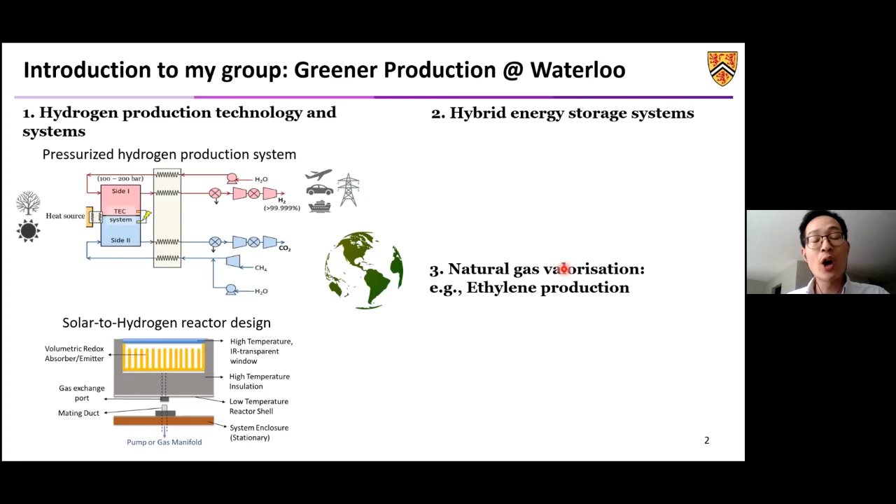In the lab, we deal with different production solutions for chemicals and energy. Currently we are working on three different topics. The first is hydrogen production technology and systems. We are developing a pressurized hydrogen production system that will decrease the energy consumption for the downstream compressor for the hydrogen gas. We are also looking at solar to hydrogen reactor design, where we want to understand the kinetics as well as the flow dynamics inside the reactor so we can design a better and more efficient solar to hydrogen reactor converting solar energy to hydrogen.

Another topic we are working on is hydrogen and hybrid energy storage systems. In this project, we are looking at using a hybrid storage solution combining battery and hydrogen to store variable renewables, for example solar and wind, so we can stabilize the grid as well as provide greener solutions for consumers. The third topic we are working on is natural gas valorization. Here, for example, we are converting natural gas into ethylene so we can decrease energy consumption as well as increase the selectivity for ethylene production using methane oxidative coupling in a membrane reactor.

In today's talk, we're focusing on the first topic, hydrogen production technology and systems, and will tell you more about how we use an oxygen permeable membrane to enhance hydrogen production from water.

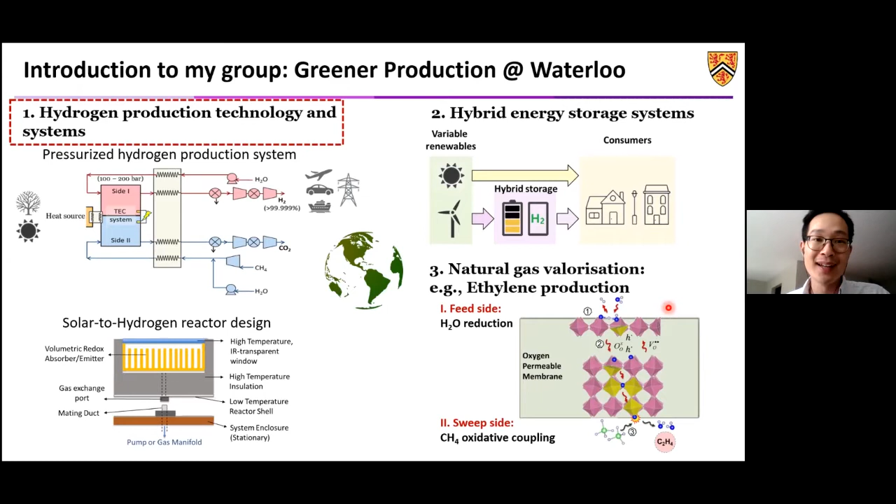Why are we talking about hydrogen these days? Because there is more and more attention now on hydrogen. Recently, if you're following the energy news, you know Germany will release a 9 billion euro plan to use hydrogen to recover their economy. Also in the US and Europe, they are developing hydrogen strategies or hydrogen roadmaps for economic development. In Canada, we are also developing a national hydrogen strategy, which could be different from the US because the US is looking at hydrogen from coal. But here in Canada, we have a lot of renewable electricity, and we also have a lot of fossil energy, so this is a great chance for us to use these energy resources to produce hydrogen for the economy.

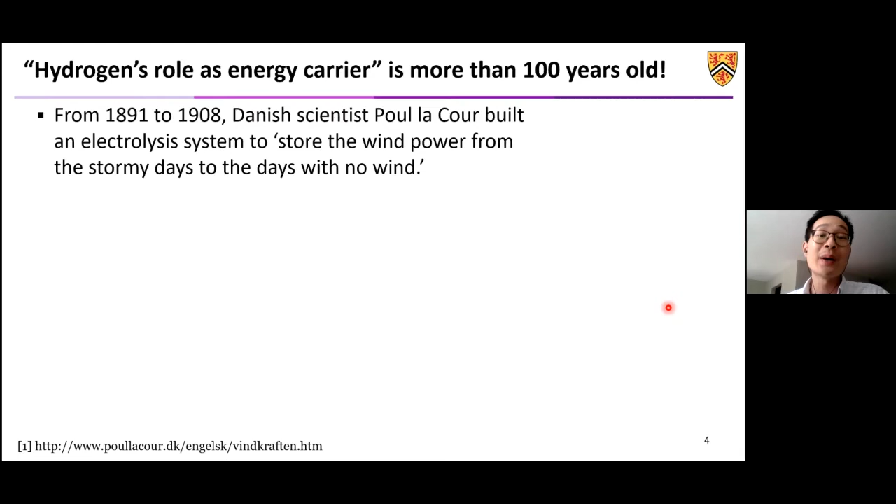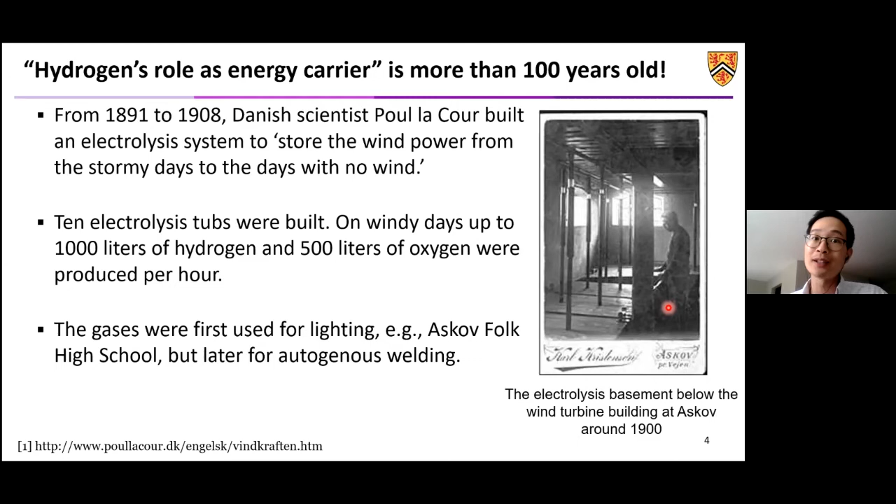This inspired a British scientist called Haldane, who hypothesized a new type of system where different power stations located at suitable distances could convert excess wind energy to hydrogen, store the hydrogen at these power stations, and then convert it back into electricity when there's no wind. This further inspired a professor in the US who was the first to use the term hydrogen economy, in the 1970s—Professor Bockris at Texas A&M University, who envisioned that the US could be supplied solely by solar energy with hydrogen storage.

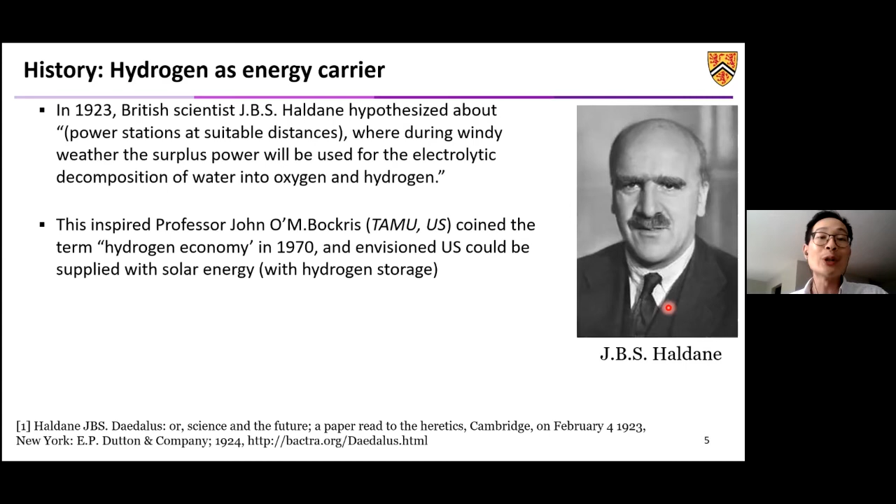From that time on, we know more about hydrogen in the energy carrying industry as well as different renewable energies industry. That's why there are more and more hydrogen products coming to the market. For example, Germany in the 1990s actually had the first solar power hydrogen production plants. Later we see hydrogen fuel cell cars as well as hydrogen fuel cell buses running around the globe. Also in 1999, Europe has the first hydrogen fueling station in Germany. So this will make you think that hydrogen is actually a very important energy carrier.

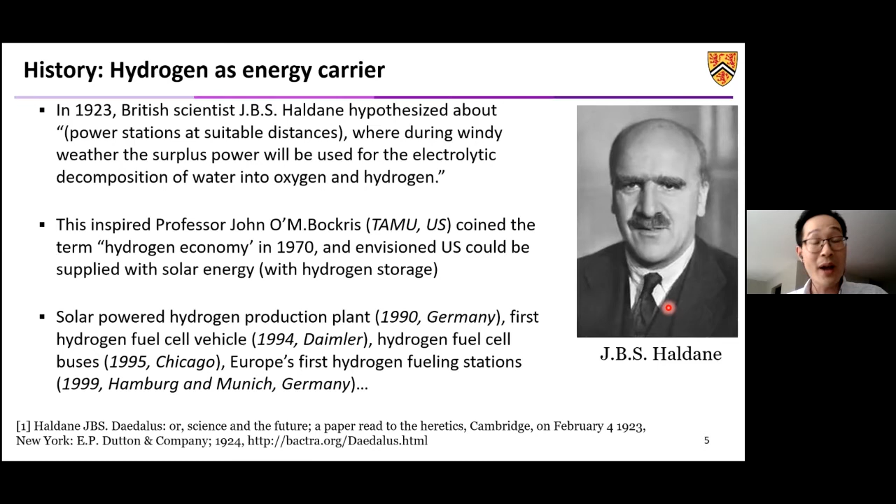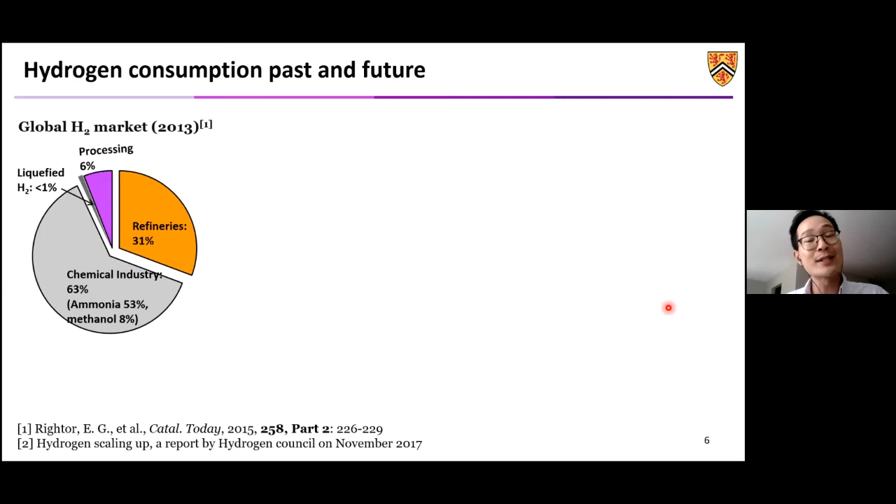However, since we're talking a lot more about hydrogen, about renewable hydrogen these days, people envision that in the near future, from now, 30 years from now, the hydrogen market can increase around 8 times, from 10 exajoules to around 80 exajoules. So the hydrogen can be used, for example, for power generation, energy storage, in transportation for fuel cell cars, trucks, trains, etc., and also to provide energy for industry, for buildings, as well as new feedstocks for advanced chemical industry technologies. So there is great potential for hydrogen in this market in the near future.

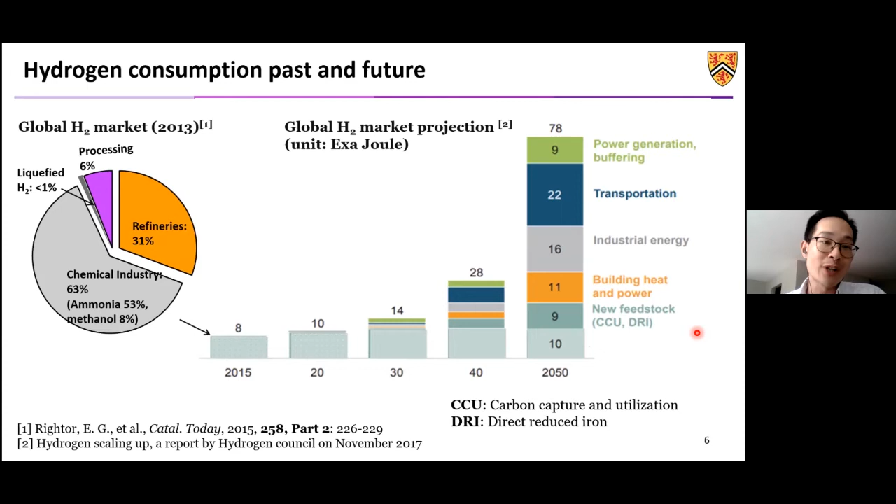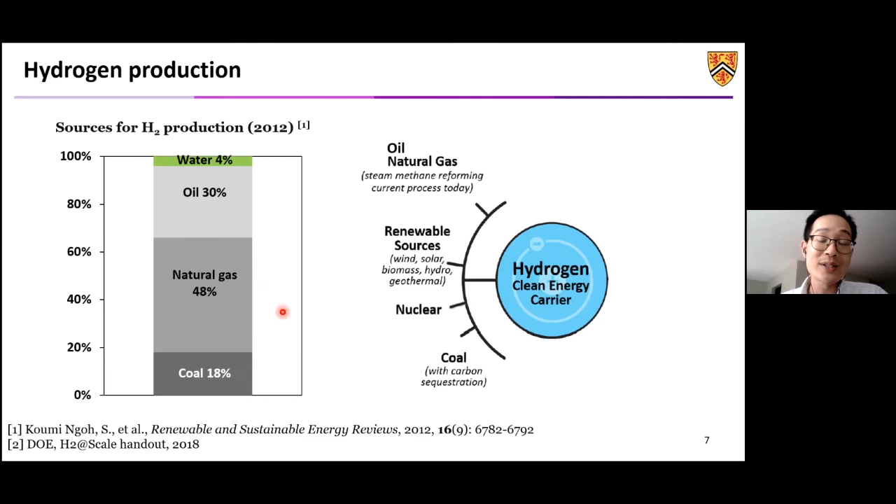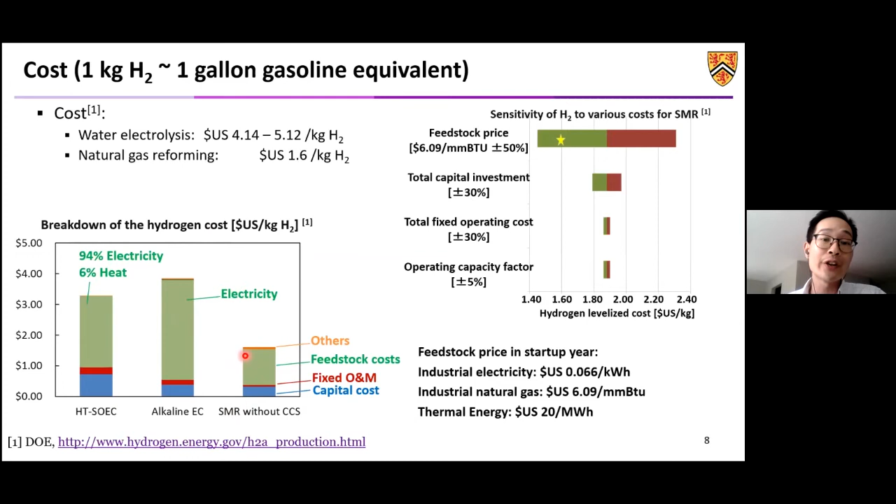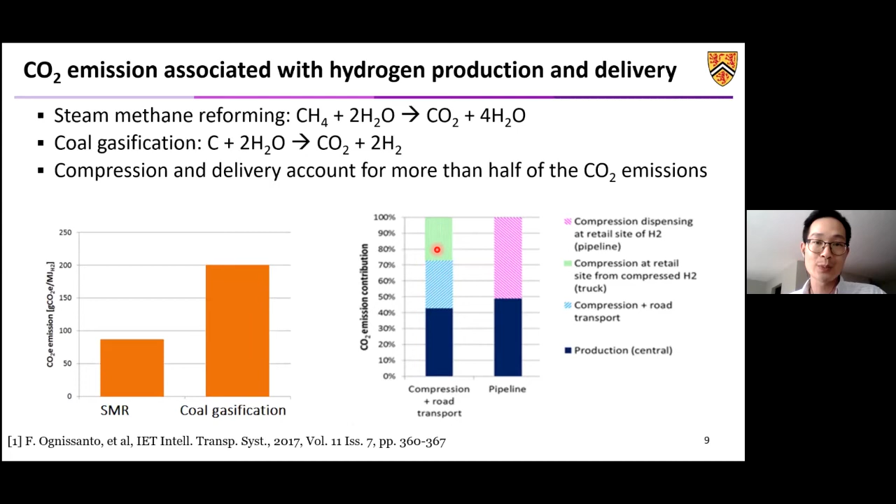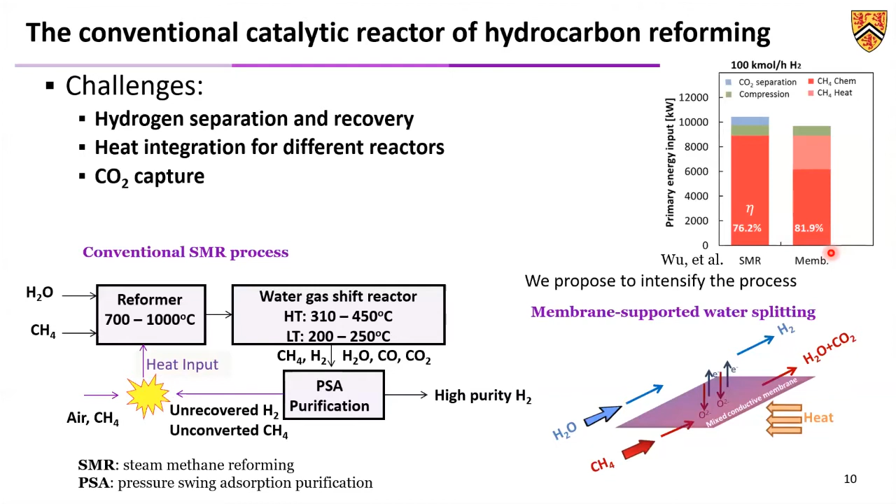We did some analysis to compare these two processes for hydrogen production, shown in this graph. Here you can see that by process intensification with this membrane, we can actually increase the efficiency from 76% to 82%, which is a 6 percentage point increase. So you might be wondering, what is this magical membrane?

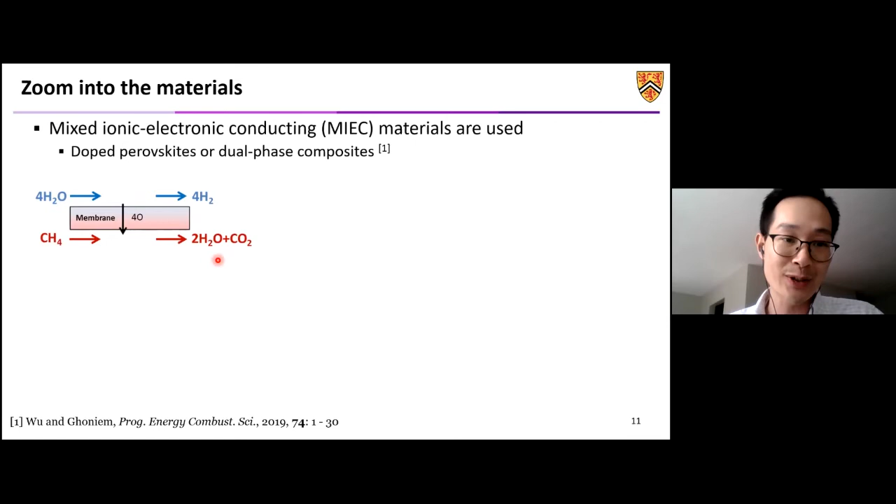So now let's zoom in to look at this membrane. This membrane that we are using is a mixed ionic electronic conducting material, usually a doped perovskite or dual phase composite. So here's the process again: we have water producing hydrogen and oxygen. Oxygen diffuses through this membrane and then reacts with the methane to produce water and CO2. If you look at this membrane, it's actually a dense membrane, so there are no pores—that's why we can achieve very high selectivity of oxygen permeation. Only oxygen can permeate through this dense membrane, in the form of oxygen ions.

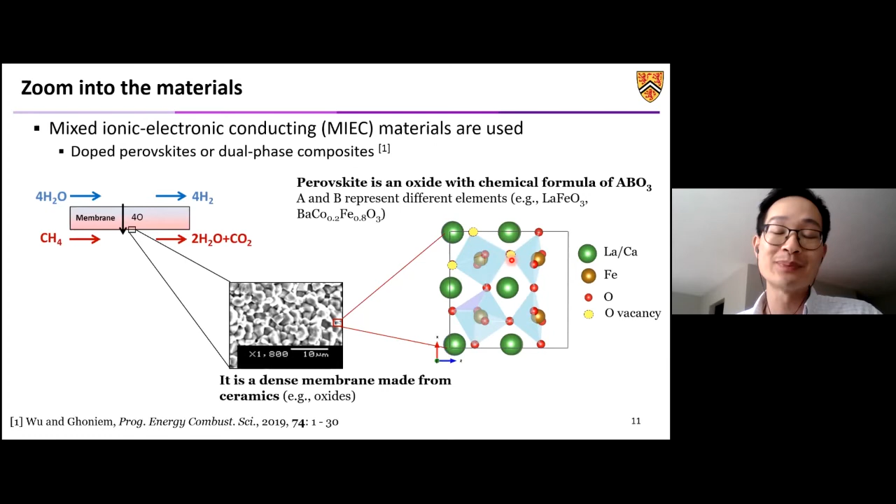If you look at the entire process, we can separate it into 5 different steps. The first step is that water vapor diffuses to the surface of the membrane. After that, the oxygen from the water reacts with the oxygen vacancies to form lattice oxygen, while the hydrogen is produced and diffuses away from the surface. Once the lattice oxygen is formed, it diffuses through this membrane to the other side, driven by the chemical potential gradient, hopping from one vacancy site to the other, to the other side of this membrane.

After that, this oxygen reacts with the methane to form CO2 and water, and that's when we can capture the CO2 very easily from the methane side. As I mentioned, this process is driven by the chemical potential gradient. On the water side, we have a very high chemical potential gradient, with high partial pressure of oxygen. On the methane side, we have very low chemical potential and very low partial pressure of oxygen. Because of this, the oxygen vacancies diffuse through this membrane from the sweep side to the feed side, while the lattice oxygen diffuses from the feed side to the sweep side.

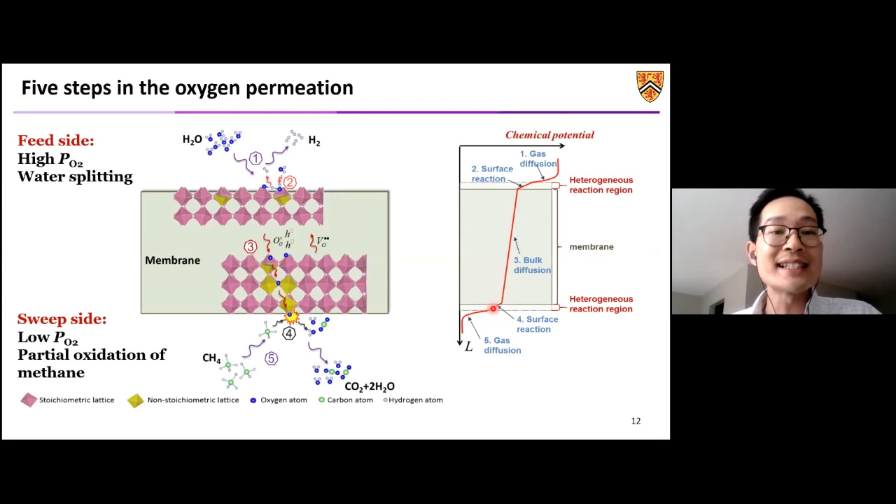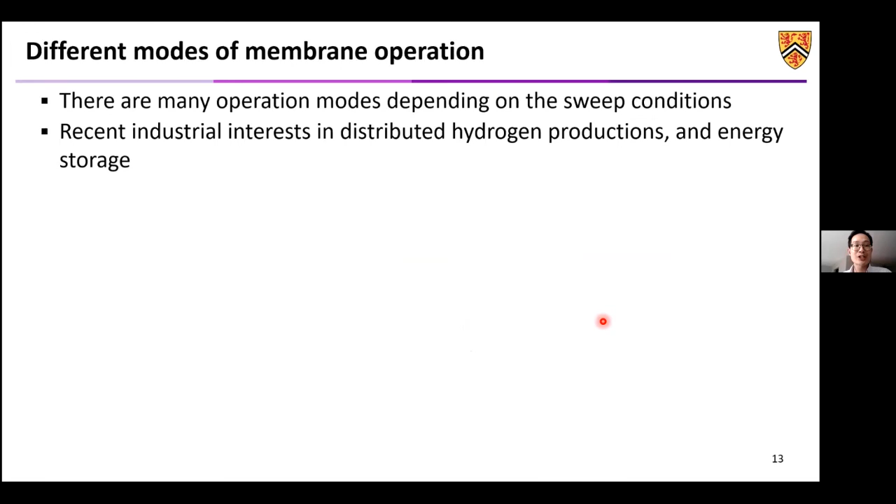So this is how it works in this membrane reactor. And since this is an oxygen permeable membrane, there are different types of operation modes depending on the sweep side. It can be applied, for example, into distributed hydrogen production or as an energy storage technology.

So the first of these modes we'll call the hydrogen-oxygen production mode. In this case, hydrogen is produced from water splitting, and oxygen diffuses through this membrane, driven by a vacuum. We lower the partial pressure on the sweep side by using a vacuum, so the oxygen diffuses from the water side to the oxygen side. In this case, we can produce hydrogen and oxygen.

And if you don't want to use vacuum because sometimes it's too energy intensive, you can also use an inert gas, for example CO2 or another type of inert gas, as a sweep gas to sweep away the oxygen from the membrane surface and create a low partial pressure on that side for diffusion. Again, this is also a hydrogen and oxygen production mode.

Since we have an oxygen source, we can control the oxygen partial pressure and the oxygen flux to react with methane, partially oxidizing it into hydrogen and CO, which is syngas, to further produce methanol, for example. In this case, we can co-produce hydrogen and syngas in this membrane.

And if you just want hydrogen, you can fully oxidize the methane by continuing to flow methane and utilizing the oxygen. In this case, for 1 mole of methane we can produce 4 moles of hydrogen, pure hydrogen from the water side. The methane is fully oxidized, and we can capture the CO2 from the methane in this case.

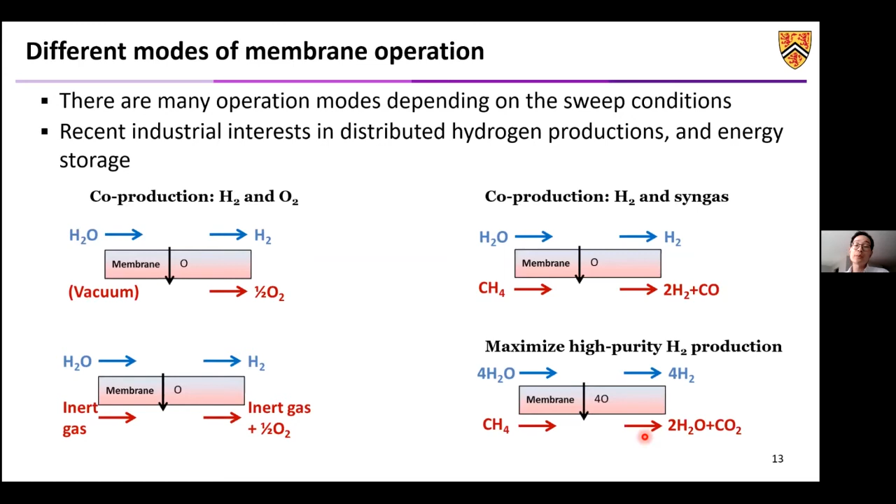And since we are utilizing this as a fuel or as a reactant that reacts with the oxygen, we can use different types of fuels. In this talk, I'm going to talk more about how we integrate this with coal gasification plants, to utilize the gasification product, which is syngas, and produce high purity hydrogen in this mode.

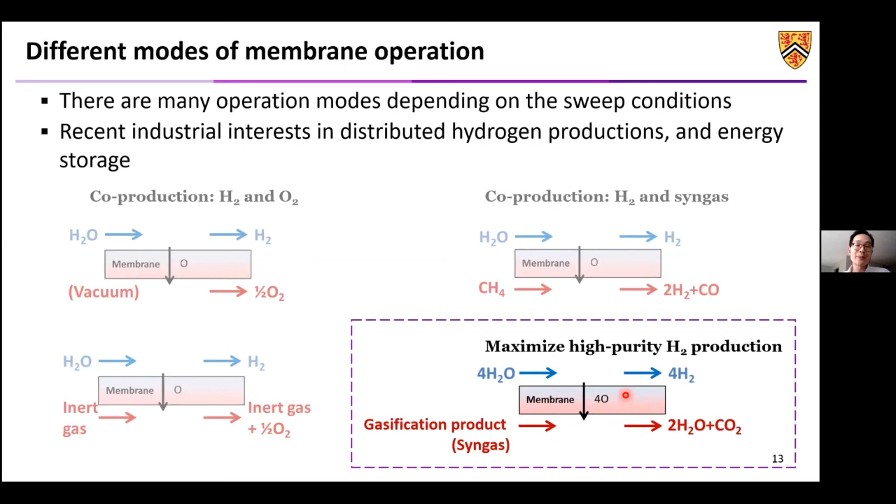So before we move on, I'll first introduce the gasification plant and what it is. Here shows a schematic of the integrated gasification combined cycle, IGCC plant, with carbon capture. This is a clean technology to utilize coal, but we can capture the CO2 in a more efficient manner.

Here shows the schematic: we have coal slurry fed into the gasifier to produce raw gas at high temperature and high pressure. The raw gas is a mixture of different gases, but it's very reducing - 35% of this is CO and 34% is hydrogen, plus some impurities from the coal. After that, this raw gas is cooled down, the dust is separated, and it's fed into a water gas shift reactor to increase hydrogen production.

After that, the CO2 is separated using a two-stage Selexol process for the CO2 compressor. Also, the hydrogen sulfide from the process is separated to produce sulfur in the Claus plant. After this Selexol process, we have a clean stream of hydrogen, which is fed into the combined cycle - a gas turbine running at high temperature, and then a heat exchanger runs the bottoming Rankine cycle, increasing the efficiency of the entire coal power plant.

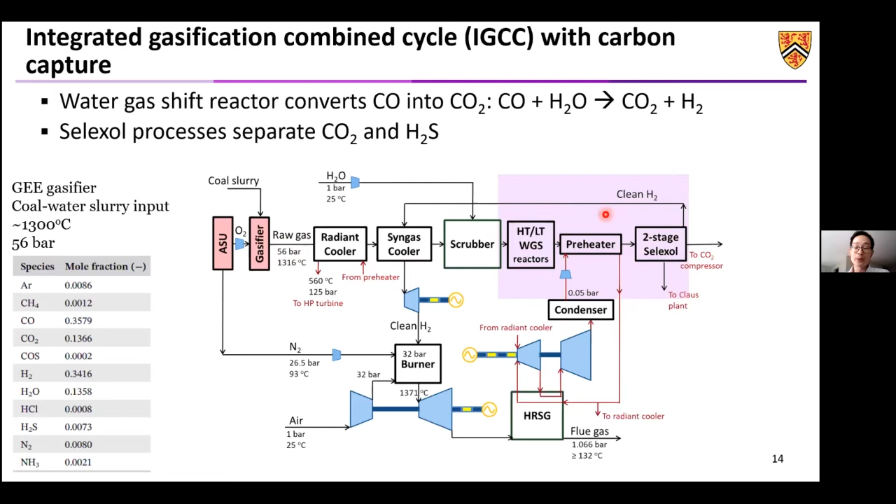So in order to improve efficiency, especially for hydrogen separation from CO2, we propose to use this membrane - this oxygen membrane reactor. On one side, we have water splitting to produce hydrogen. On the other side, we use the gasification product, syngas, as a fuel so that we can consume the oxygen and drive more hydrogen production.

And because we know that coal gasification has a lot of impurities, such as H2S, the membrane has to resist this type of poisonous impurity from the gasification products.

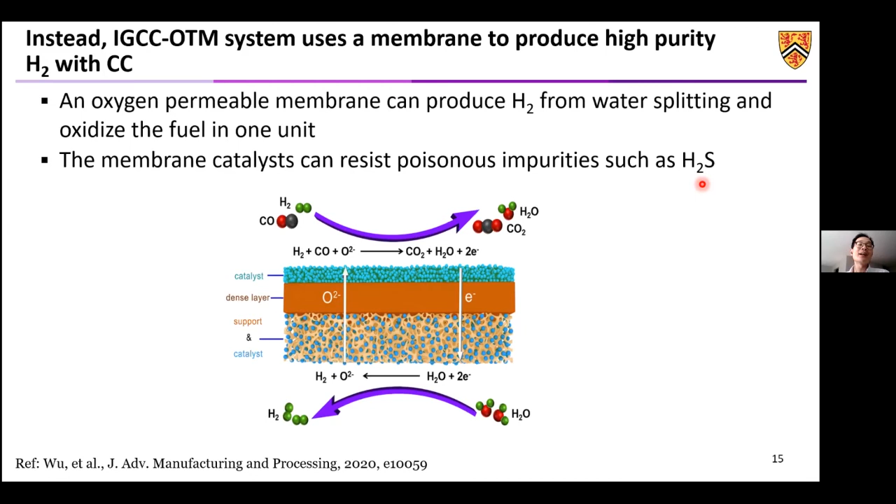So what it looks like in a system, it looks like this. In this case, we have this high temperature raw gas from the gasifier. It will go to this high temperature membrane reactor so that we can utilize the heat integration from the high temperature gasifier to the high temperature membrane. After that, using this membrane, we can use the syngas from the gasification to produce water, or produce hydrogen from water splitting.

On side 2, which is the water splitting side, we produce pure hydrogen with water as a mixture. And then on side 1, we have the syngas reaction. In this case, the only addition to the plant is this isothermal high temperature membrane reactor, and also some post-processing units to increase the efficiency of the plant.

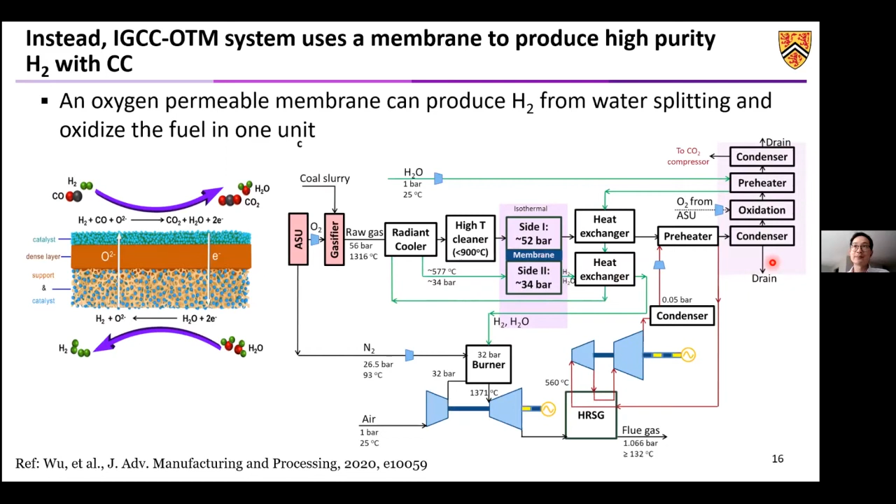So we use the counterflow configuration to maximize the conversion of this hydrogen. This is what we mean by counterflow: the syngas flows from the left to the right, but the water flows from the right to the left.

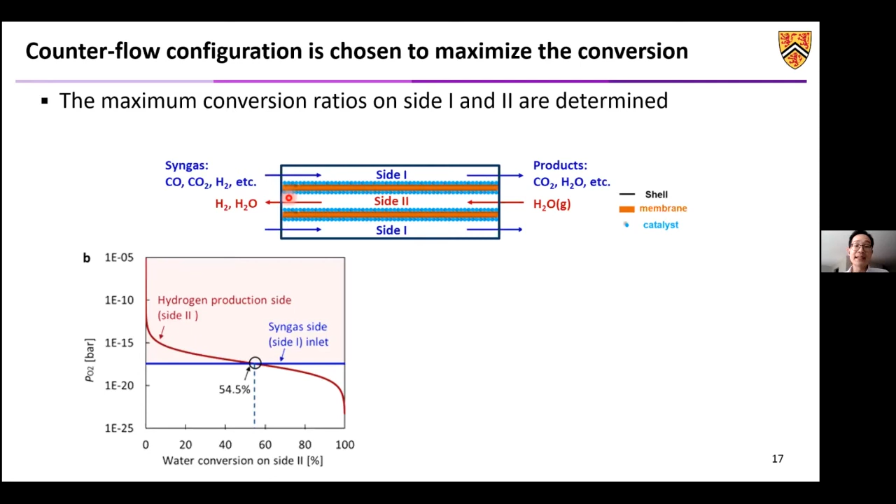We also know that when water is splitting, we are producing hydrogen, so the partial pressure of oxygen actually drops as the water is split. That's why we can decide what is the maximum water splitting ratio in our membrane reactor, which is around 55%.

On the other side, it's very similar. The maximum partial pressure is at the inlet on the water side, and the lowest partial pressure is from the syngas side. But when the syngas is oxidized, the partial pressure of oxygen increases, as shown here.

However, we can see that even though we have almost full conversion of the syngas into CO2 and water, we still have a potential gradient. That's why the syngas conversion ratio can be very high, as high as 99%.

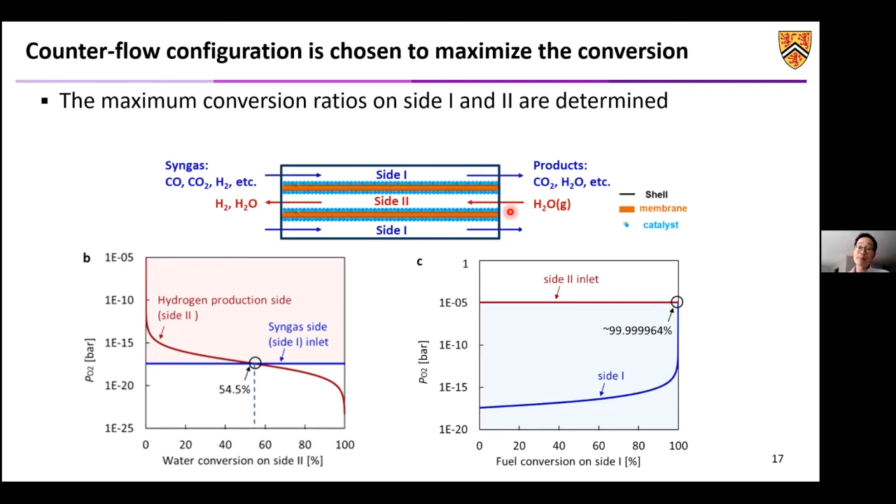So after we know the maximum conversion in our reactor, we can build a model for this system. We used Aspen to build this model to evaluate the performance of this new cycle. We defined the first law efficiency of this plant as the net work output of the plant, the electric output of the plant, over the heating value of the coal.

The net work output is defined as all the work produced by the turbo machinery minus all the auxiliary consumption, such as pump work, CO2 compression, oxygen separation, the Selexol separation process, etc.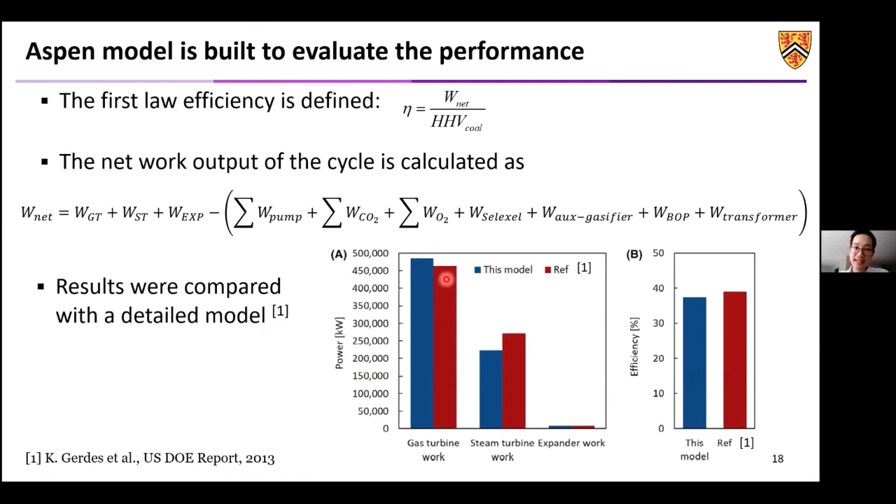The reference plant is the IGCC plant without CO2 capture. The IGCC WGS is the conventional IGCC plant with CO2 capture using a water gas shift reactor as well as the Selexol process. You can see that our newly designed IGCC OTM process, using an oxygen transport membrane, can decrease the auxiliary loads by a lot.

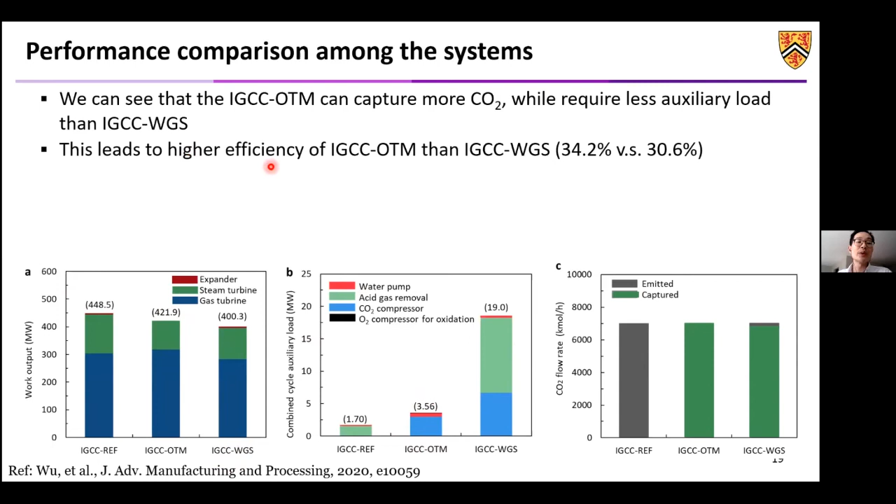That's why we can improve the efficiency of our plant. Because we decreased our auxiliary load, our net work output, compared with the conventional IGCC with CO2 capture, increased. That's why we can raise our efficiency from 30.6% to 34.2%.

We also calculate the energy consumption for CO2 avoided in our plant, and we can see that our newly designed IGCC OTM has an energy consumption almost 60% lower than the conventional IGCC with water gas shift reactor for CO2 capture.

These results again convince us that this new design is actually working. We can utilize this IGCC OTM process to increase our electricity output, even when we are capturing the CO2.

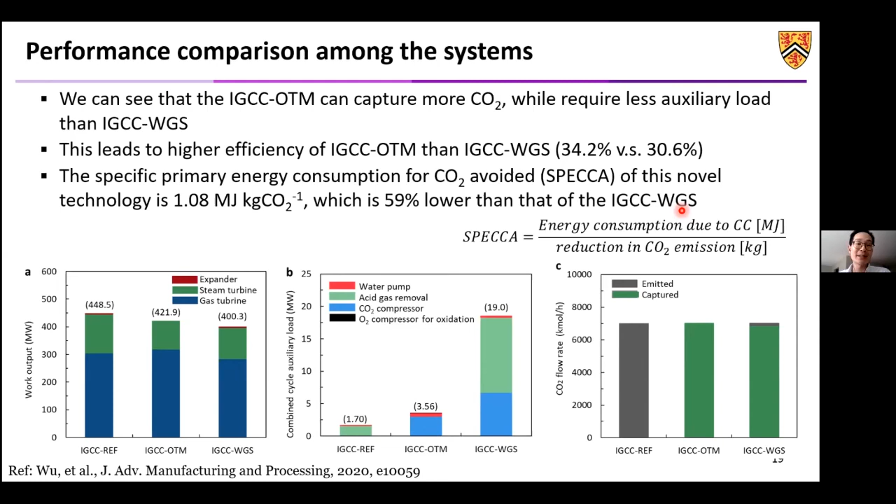Then you might be wondering whether this membrane actually works in reality. So that's why in the lab we designed this type of membrane and tested it in a very similar environment, fabricating a very stable membrane for this application so that it remains stable even though the environment is very reducing as well as corrosive.

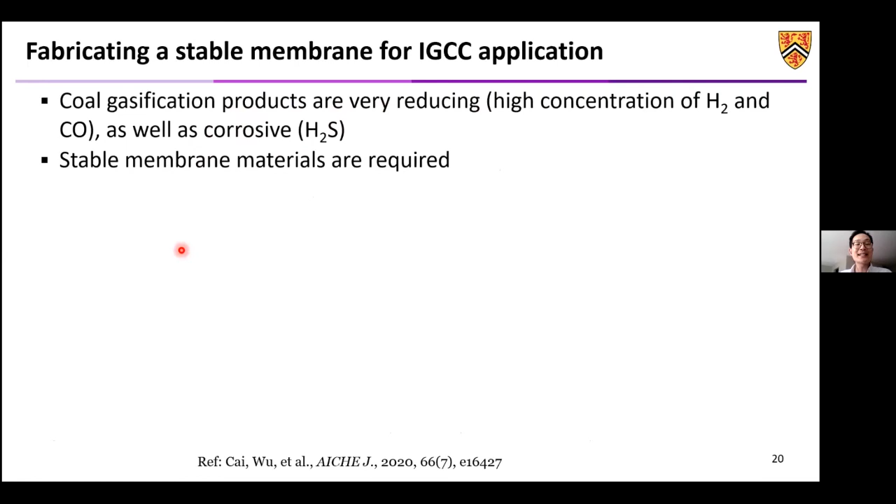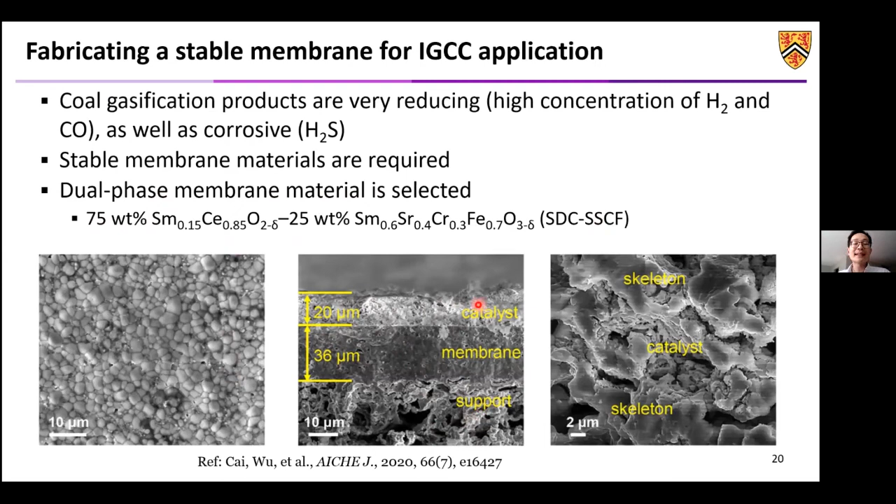We designed the membrane material as a dual phase material, and the chemical formula is shown here. If you look at a microscopic image, you can see the membrane is very thin, 36 micrometers. We have a catalyst on top of this membrane to enhance the reaction rates, and also a support, because the membrane is so thin we need mechanical support to increase its mechanical strength. The catalyst is shown in the next slide.

The reason we want to use a catalyst is because the surface reaction is actually the rate limiting step based on our model. We assign different resistances for different steps, since there are 5 steps in our membrane process, so we can compare which resistance is largest and therefore the rate limiting step. From the modeling, we see that the resistance on the sweep side, the surface reaction, is the rate limiting step, so we apply a catalyst on the surface to enhance the surface reaction and achieve higher hydrogen production rate.

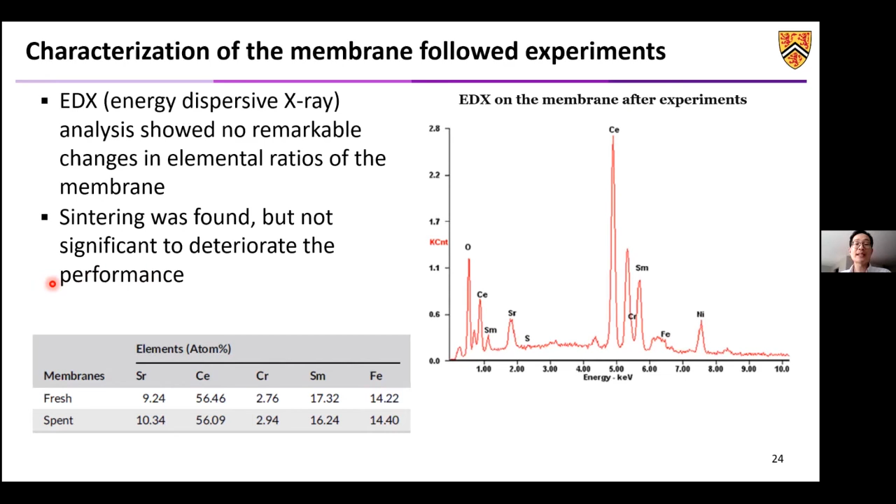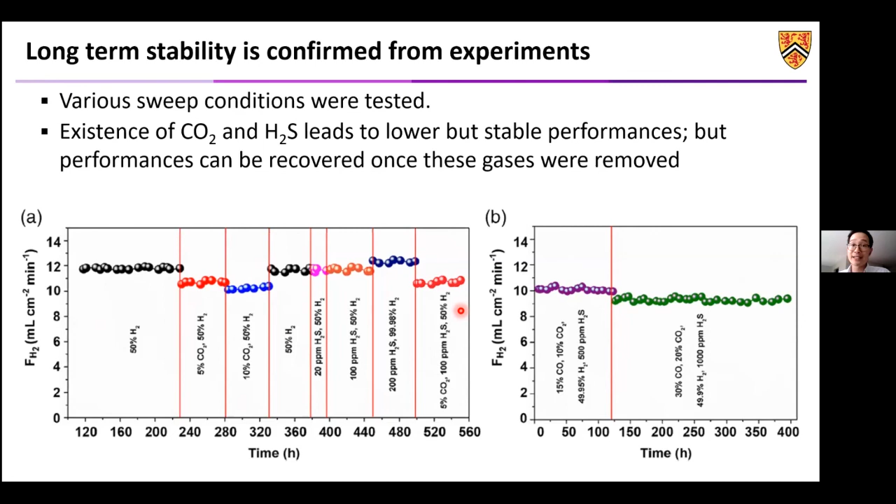So to summarize, I introduced you to this type of oxygen transport membrane to produce hydrogen, and we used this IGCC application as an example to show how we can use this OTM process to increase the efficiency and decrease the energy penalty for CO2 capture.

I also showed you that we experimentally fabricated this dual-phase membrane in the lab using non-precious metal catalysts, so that we can make sure the cost of the membrane is low, and also this type of membrane can perform very stably under very harsh environments in the gasifier.

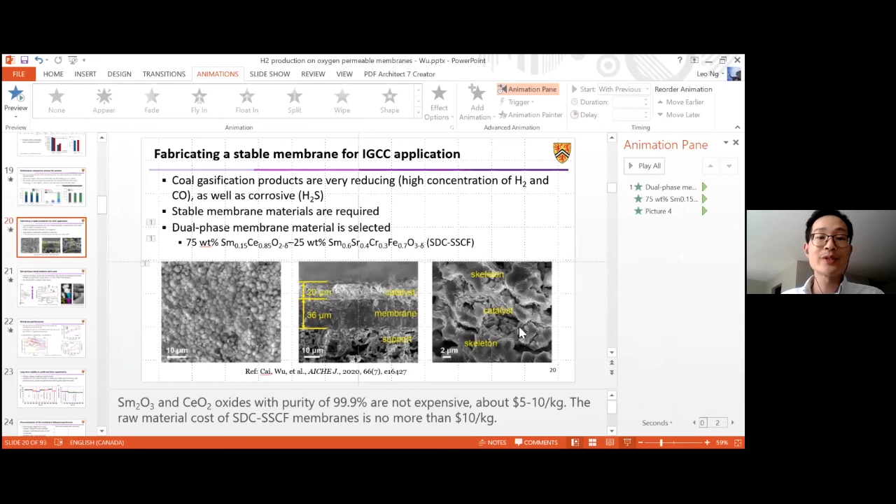Our collaborator in Dalian is scaling up this type of membrane production process. As I mentioned, the membrane we're using is this type of dual-phase membrane. We are not using a very expensive metal, so the source of these metals is very cheap, but the manufacturing process is more expensive at this moment because it's not scaled up. So we are working with Dalian to scale up this process so we can decrease the production cost of this membrane and move toward commercializing it.

So Dalian has a partnership with the University of Waterloo to explore this production of the membrane? We are exploring that, yeah. So they have the equipment on site to produce these membranes at medium scale. I would love to talk further, maybe off this webinar, and see if there are opportunities for us to collaborate with your work for some applications in Ontario. Yeah, sounds good, I would love to do that. Thank you very much.

Any more questions we have? I guess I have a quick question, if that's okay. Please go ahead. Thank you, Professor, that was such a good talk.

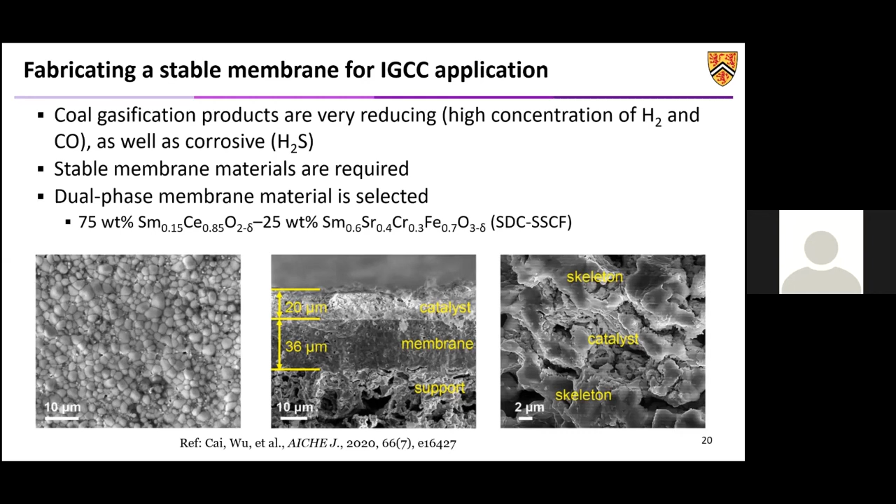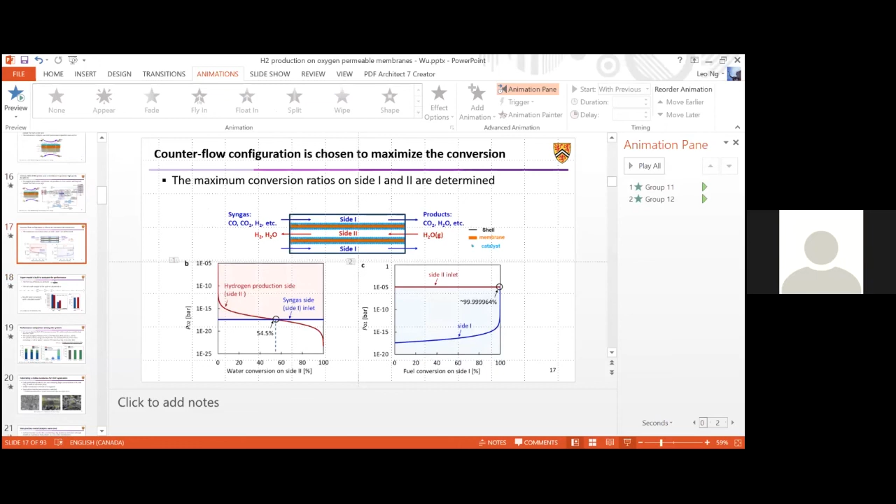I just have a quick question about the counterflow configuration that you talked about. I wonder if that counterflow configuration can be used for other applications, like the production of ethylene, as well as hydrogen, or is that specifically for the IGCC application?

Yeah, so thank you for the question. This configuration can be used in any membrane reactor. The reason we want this type of configuration is to make good use of the chemical potential across the membrane, so that we can increase, for example, the conversion from the water side, as well as increase the conversion on the fuel side. So yes, it can be used in different types of applications.